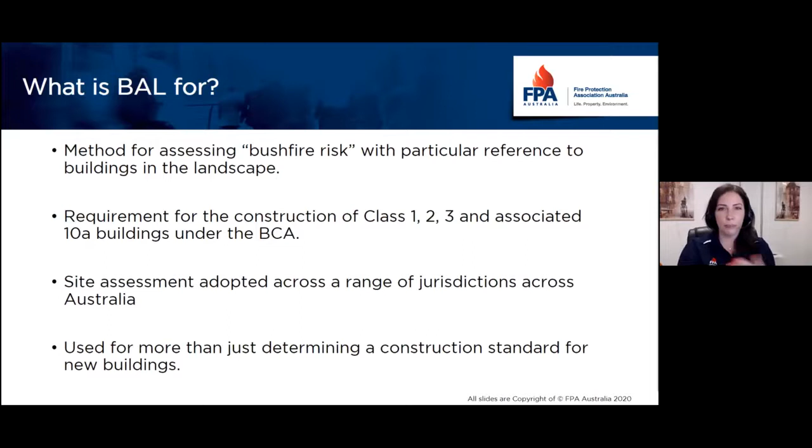Just to put it in perspective of where you can find it and why we need it - where does AS3959 sit? It usually sits within the building requirements. In the national context, you'll have an Act of Parliament, which is the primary legislation - your building act or planning act - which refers to regulations. Regulations quite often reference codes and standards. Depending on who requires the bushfire attack level assessment, you might find a reference to AS3959 in your regulation. It can also be called on directly in the NCC. AS3959 sits in this area and is only required when referenced by legislation.

Just to make it a little less complicated - this is from my home state. Each state has a different set, but in Victoria, for example, the building code works like this: we've got a Building Act which calls onto the Building Regulations, which calls onto the National Construction Code, which calls onto the Australian Standard AS3959 or the NASH standard. That's where you have to do your site assessment.

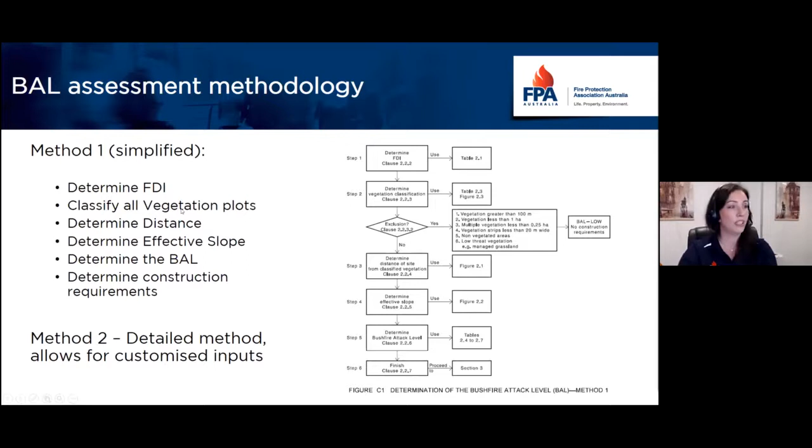FDI is the fire danger index, and you can find the reference to it for your particular jurisdiction within AS3959. For example, in Victoria it's either 50 or 100 - usually the more general area is 100. If you're in New South Wales, you've got 100 or 80 depending on which area you're in, and ACT is 100. Western Australia is 80, so I think most of Julie's examples are going to be Western Australian. Then the second step is classifying vegetation.

Vegetation is classified using written and visual description data provided within AS3959. There are 8 classifications plus exclusions, and it's the primary governing factor in determining the BAL. It's one of the most important steps to get the vegetation classification correctly. The exclusions present are one of the most contentious issues in the industry.

In fact, we were just discussing it with Julie and other members of our Western Australian working group - the problems with practitioners and government agencies looking into exclusions in different ways. There's a constant need to provide more clarity, practice notes, and good practices to understand what kind of exclusions exist and how you can apply them, to make sure people do not underestimate the bushfire risk, because it can result in quite tragic outcomes.

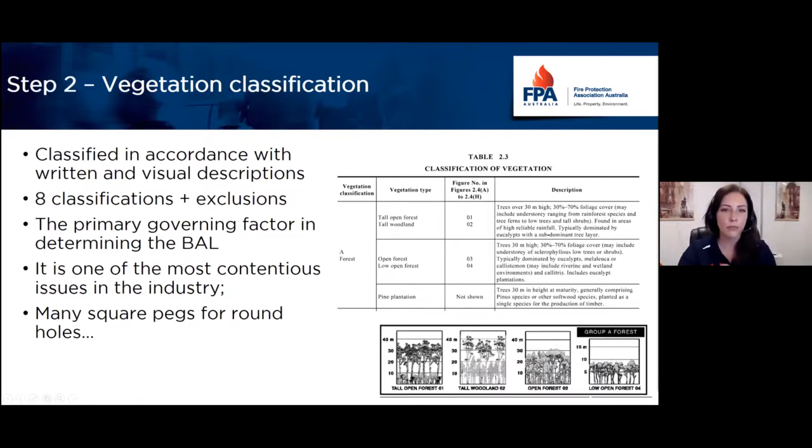Next example is a woodland. Woodland generally has a description in the AS3959 within the written description and images. A general rule of thumb, not a written rule, but the way we try to teach it in training, is that the difference between woodland and forest is that you can run through a woodland, but you can't walk properly through a forest.

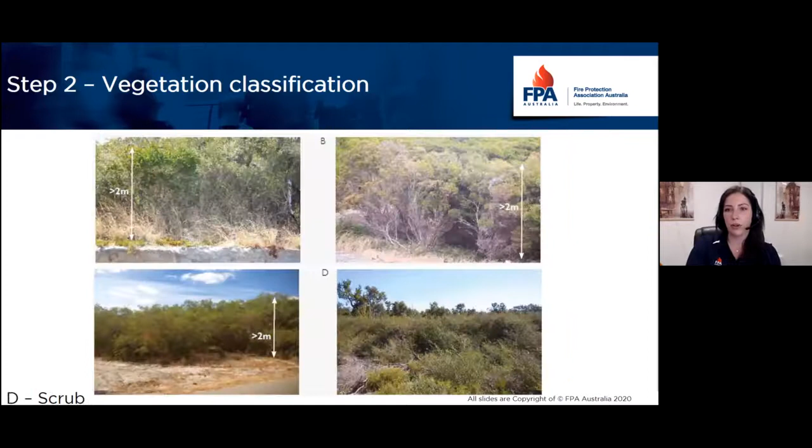The next step you require is to determine the distance - so we went around the site, we've classified the vegetation, now we need to identify the distance between your building footprint or elevation and the classified vegetation. You need to do this through the horizontal measure from the edge of vegetation to the building itself.

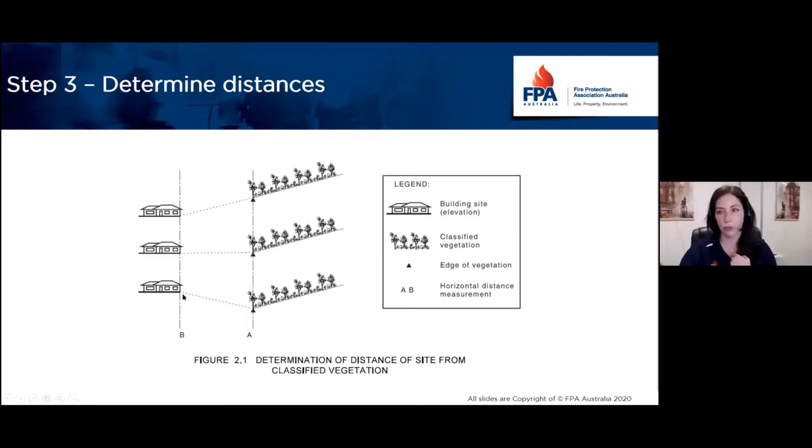The AS3959 is full of exclusions and explanations of how things are done. When you're assessing vegetation for forest, woodland, and rainforest, classified vegetation should be determined by the understory rather than the trunk. That's an exclusion you need to be aware of. So that's going to be the line along which you probably do the vegetation distances, and this line can probably move a little bit forward.

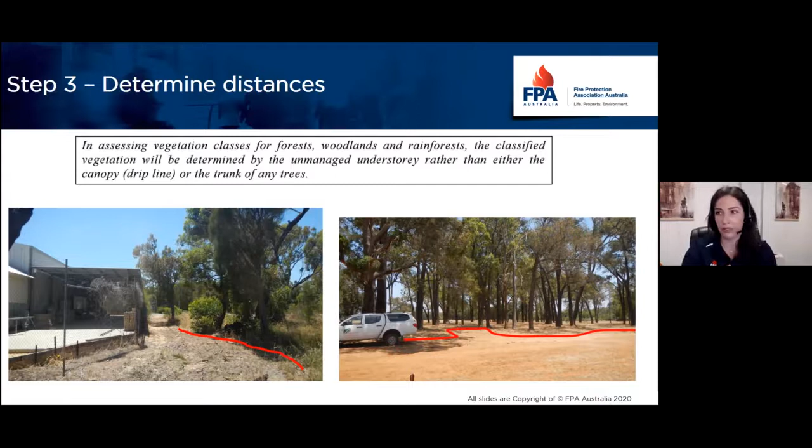Once we've identified the distance, we also need to determine the effective slope. There are two slopes when looking into site assessment - an effective slope and a site slope. Site slope is used for the Method 2 calculation, so we're not talking about that at the moment.

So the slope that we're looking at is this slope under the vegetation. Say this is forest, this is our building, we need to identify this slope - not this one, but this slope. I'm hoping you can see my mouse moving around because I make a lot of comments about that.

So there's a bit of description. The way that you usually do the slope identification, you want to do it beyond the boundary of your assessment. Your general site assessment boundary within AS3959 kind of sits within the 100-meter radius.

Maybe 150 meters. But depending on your site, if you've got a very complex site, if you've got a lot of slopes, or if the slope goes up and down, you probably want to go a bit further out just to make sure that bushfire behavior is properly calculated, that you're calculating all the steps properly, and that you're not under or overestimating your risks.

The way that the AS3959 method 1 calculation does it, the slope is calculated within increments of 5 degrees. So if it's 3 degrees, it's going to be treated the same as 0, 1, 2, 4, and 5. If it's 6, then it's going to be within 5 and 10, and so on till 20.

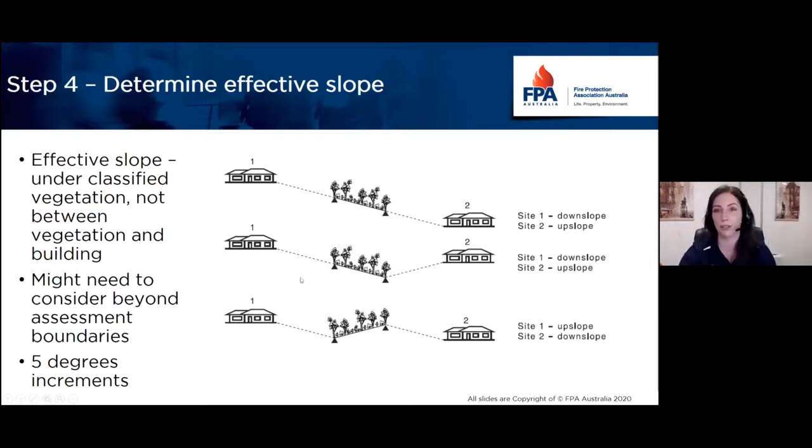So if you do have any questions, always refer back to the images. These are all images from the AS3959. So that's explained there.

Then, as I said, there's quite a lot of explanation of how the vegetation and the slope can be determined, and there's an explanation of what the effective slope is and how you can calculate everything.

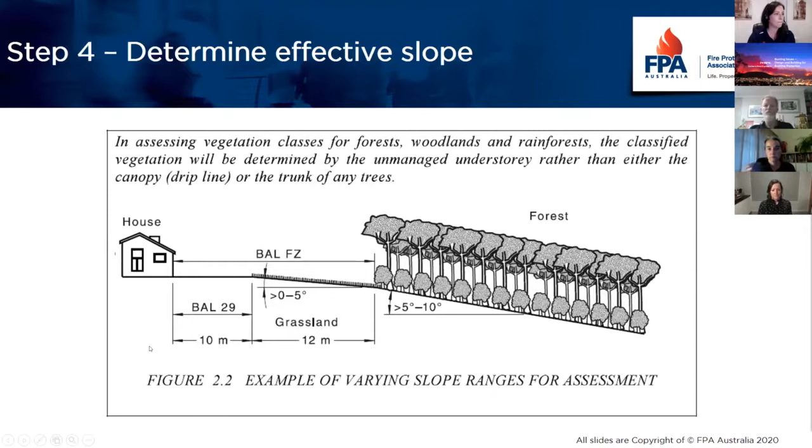And then once we've calculated all of the slopes, we've got our slopes, we've got our distance, we know our vegetation, we can then look into the BAL tables and determine your BAL for your building.

So for example, if we had forest at a downslope of 2 degrees, and we're sitting within a distance of 30, 32, or 33 meters, then we're sitting within BAL 29. Generally that's allowed as the building standard, which I think is a middle ground for most of the states.

Depending on your FDI, you have to make sure you're looking into the table with the proper FDI. Again, in the AS3959, it's tables 2.4 to 2.7, depending on the FDI that you need to have a look into. So it's your fire danger index.

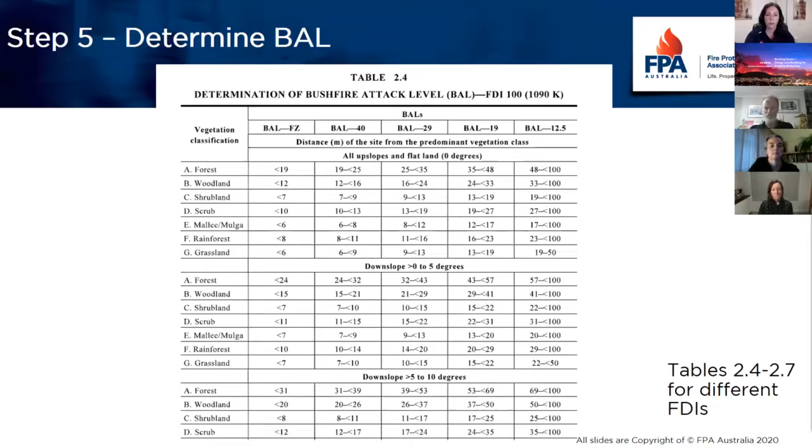And just to show you an example of how the BAL assessment is done with a map, we've done one small map. This is in Victoria, in Melbourne.

We went around, and if it's going to start—sorry, apologize. Yep, there we are. We went around and did a bit of classification of the vegetation.

We had a look at it, so we could see there's a bit of woodland, because it's relatively woodland, it's not really tall, it's quite sparse, and you can relatively run around. It's kind of somewhat managed.

Then there's a bit of excludable vegetation—apologies for my angle, I had a fun day I guess, I don't know why it came out like that—and that was excludable, that's just a managed road, and there's a bit of forest there as well.

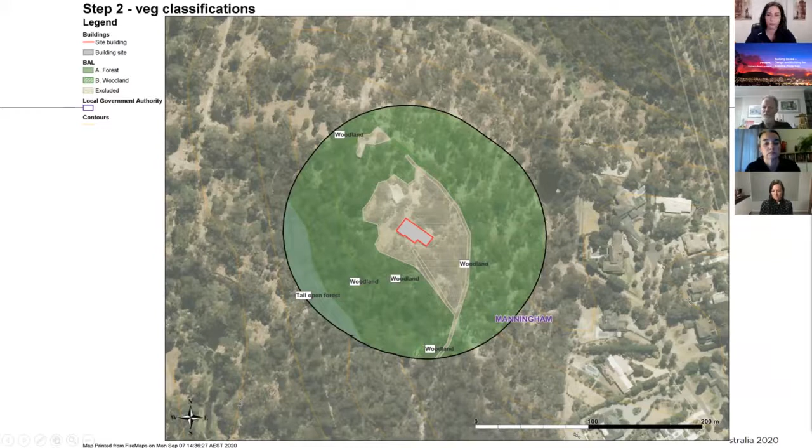This is the distances to the plot, so you can see the plots better here. You can see that's not the best mapping I've done, but it was done for students as a demonstration at some point.

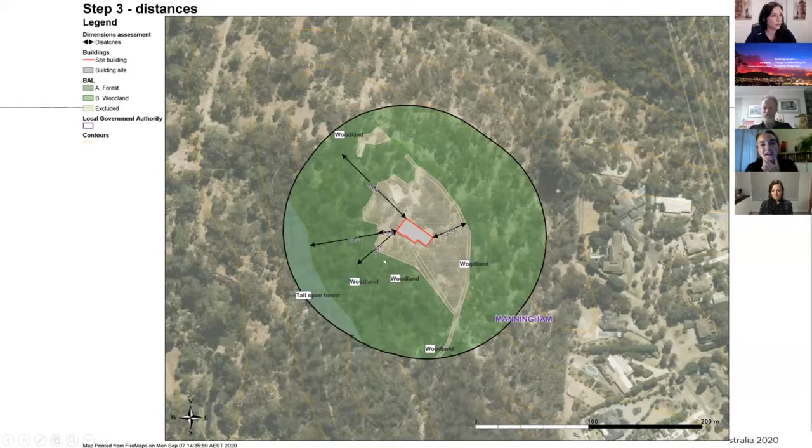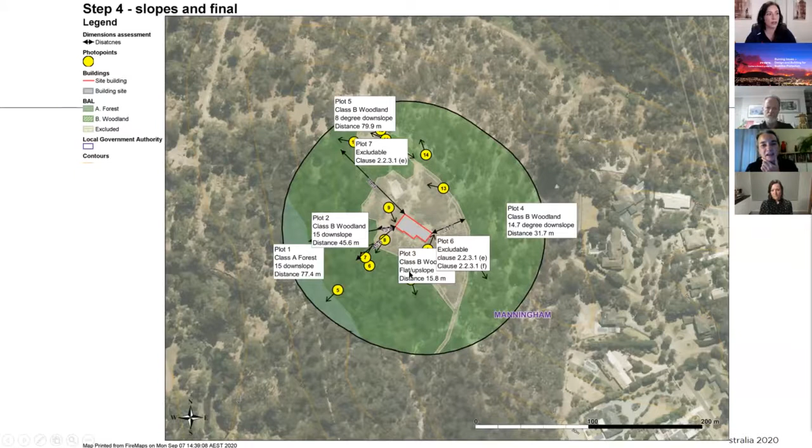And that's where we are putting our plots. So we have multiple plots that are affecting the building, and that's all the information that we've collected. And then we're putting it together in a table.

So we've got our vegetation classification, a plot number, a vegetation classification, an effective slope (so it's quite steep), the separation distance, and then the BAL that results. We've got 7 plots in this particular case, and we have to choose the worst case scenario.

So that's how the BAL assessment is done. I don't know if I've managed to convince you how difficult it is to get done. If you're going to start going out and doing it yourself, you will probably notice there are a lot of questions that can arise from this.

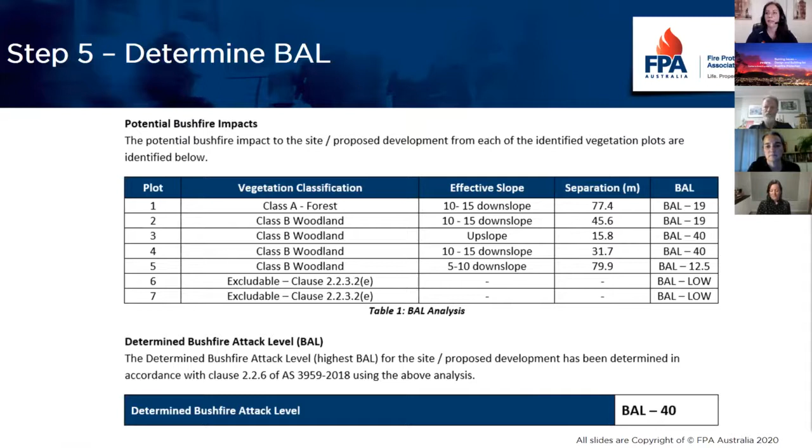We always suggest you use our BPAD accredited practitioners. FPA Australia has developed, and we administer, the Bushfire Planning and Design Accreditation Scheme. It has been implemented since 2006, and it recognizes practitioners who can assist the community undertaking development on land subject to bushfire impact.

It was introduced in New South Wales in 2006, then in Victoria in 2012, and in Western Australia in 2016. We've got a national framework approach that then customizes for specific jurisdictions. We are looking into Queensland and South Australia at the moment as well.

We're accrediting individuals or practitioners who provide bushfire assessment, planning, design, and advice services. All of our practitioners have to meet specific criteria, which includes training. They have to maintain their CPD points, and they all have to have insurance, which is quite important for customers when getting advice from somebody.

Our accreditation scheme runs across 3 levels. We get quite a lot of calls and questions asking to differentiate between the three. If you're looking into doing a simple BAL assessment, just a BAL assessment, that's generally our BPAD level 1.

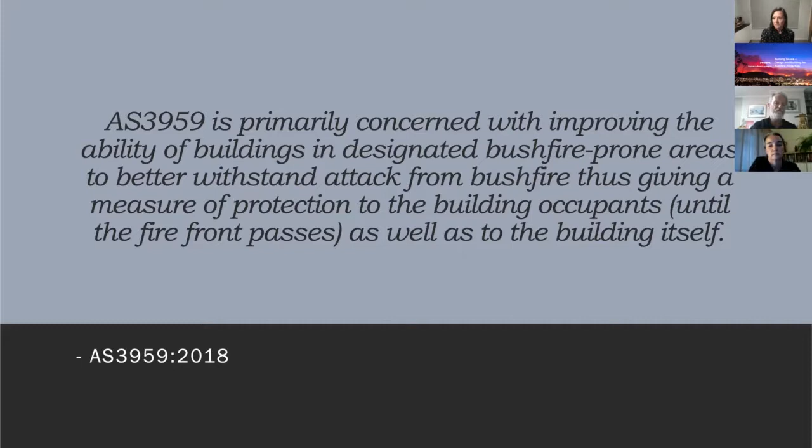This is just an overview of what AS 3959 is concerned with, which is improving the ability of buildings to withstand the impact of bushfires and giving a measure of protection to the occupants as well as the building until the fire front passes. So it is not intended to guarantee protection of property, it won't guarantee protection of life. It's intended to withstand attack.

From our perspective, designing and building for bushfire protection covers a number of factors. The first one, which Maria just talked about, is the BAL level. That's an integral part, because it identifies what your actual risk is. We have a fire danger index of 80 in Western Australia, based on our different vegetation types, and there are different vegetation types and bushfire risks in different parts of Australia.

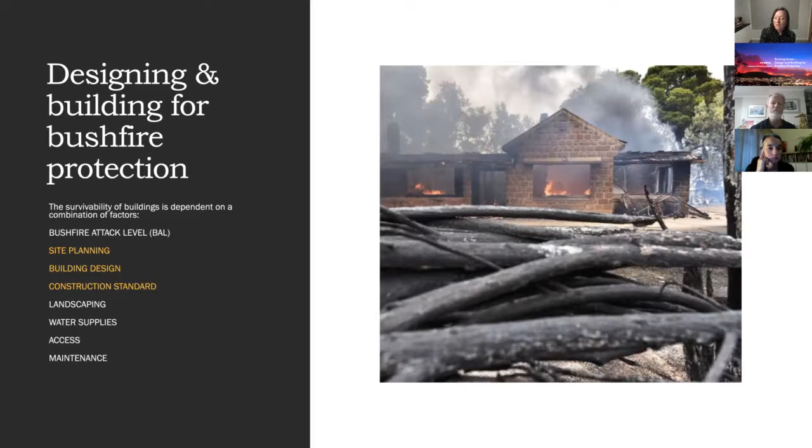The other things I'm going to talk about today relate to site planning, building design and construction standards. The other factors which are very important, but which we don't have time to cover, are landscaping, water supplies, access and maintenance. All of those items are referred to in AS 3959. And if you ever have a bushfire management plan developed for a subject site you're working on, they will usually take into account all of those aspects.

In terms of site planning, what you can see is that there are some factors of our site that we can't change, and some factors that we can change, and we can always think about how we respond to it. A BAL is determined by three main factors: slope, vegetation, and separation distance.

Sometimes you can reduce your BAL by considering those site conditions and identifying if the house could be better located to reduce its BAL. In Western Australia, under some of our state planning considerations, if you have a subject site and you can achieve lower than BAL 40, the local government will require you to position your house in that placement rather than construct in BAL 40 or FZ, because they're not considered under our state planning policy as acceptable bushfire risks if they could be achieved as lower.

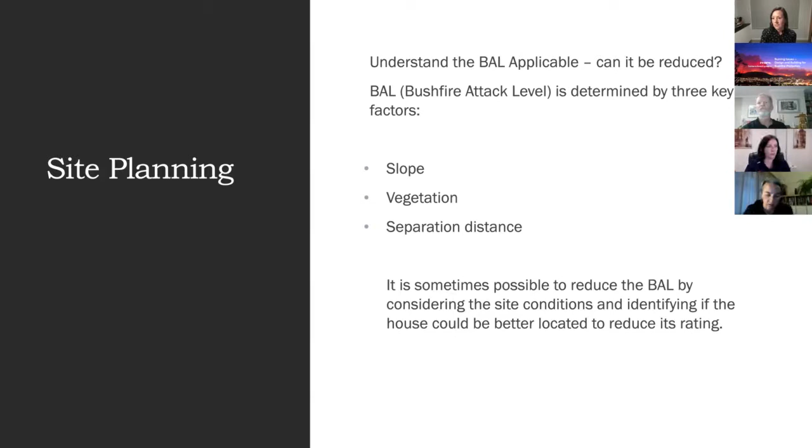Hi everyone, just while we're getting Julie back, my name is Jacquie Cleary.

I'm here tonight to talk about one of Renew's new projects that's coming up. I'll probably give you a bit more information about it later on after the speakers, but it's rebuilding for climate resilience. So it was probably a good opportunity to come along tonight and talk to you about that and the project, the resources that we're working on, the events and so on. And obviously lots of crossover tonight with the speakers that are here, and I'm busily taking notes from the presentation at the moment. There's lots to learn about BAL and so on, and bushfire resistant design.

I'm not too sure if Julie's back with us yet, so I could possibly go into a little bit more detail about it while we're here. Might be a good opportunity to jump in and talk about that while we sort out Julie's connection and her presentation, and give her a chance to catch up again when she rejoins.

As I was saying, this is important when we're doing site planning: to consider our separation distance from classified vegetation, as well as the slope. As Maria was explaining, there are differences in terms of where the house is placed, whether we go upslope or downslope, and that can impact on your BAL.

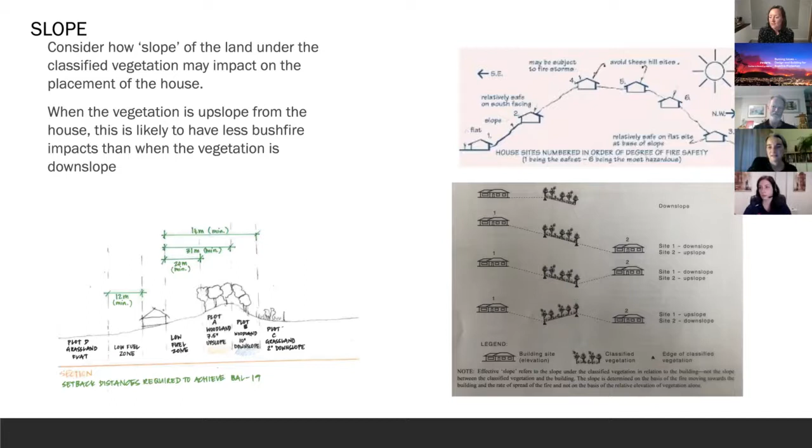So it's important to consider house placement at that time, and to take the advice of your bushfire practitioner in that regard. This is an example of a project in the Fitzgerald region of Western Australia. This building is a field station, and it has a residential component, which is how it got picked up under AS 3959, and was actually one of the first ones to be constructed when that legislation changed in Western Australia, which, as Maria had outlined, is only really 2016 that it came in for Western Australia in earnest.

This project actually ended up with only BAL 12.5, despite being in what was quite a high bushfire risk area, with mountain ranges some distance away, but we had a mixture of vegetation types, including shrub, scrub, mallee mulga, and woodland. What was key with this project was actually locating the building in a natural clearing, so that we didn't have to impact on existing vegetation types too much.

Particularly important for this project because it's an entirely off-grid facility designed for Bush Heritage, who obviously have strong environmental principles and didn't want to be out bulldozing land to build their new field station, which is focused on the Gondwana Link project. So what was key here was actually getting good solar orientation, getting good placement of the building with consideration of all those site conditions that are important in building design, with prevailing winds and those sorts of things, which were also going to assist in achieving resilience for the building design through its placement.

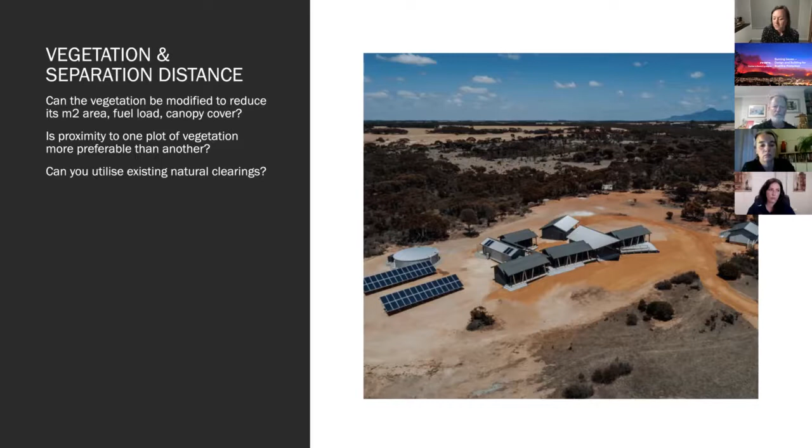We also were obviously targeting particular kinds of vegetation. So we had some grassland here, which they were able to manage. That was the vegetation we could get closest to. So it's a good example of just that initial process of site planning and using natural clearings.

We also had to protect key habitation spaces. As I mentioned, for this particular site, they're out there tracking their restoration work. So it was critical that the works we did to manage bushfire risk, including adding firefighting tanks and access and egress tracks to allow for safe evacuation, didn't impact on habitation for local species.

We also needed to respond to the local climate conditions. We had to maintain the existing environmental qualities and manage asset protection and safety of occupants and fire responders. So a critical component of planning for bushfire is also making it safe for those fire responders to get into the site to assist in suppressing fire or rescue, and leaving as well, which is a critical aspect for site planning.

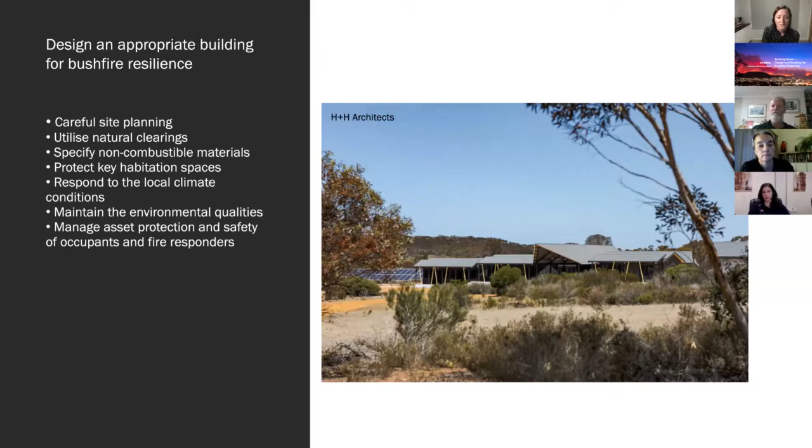So another aspect of site planning is obviously bushfire resilience: building to last and selecting materials that are robust and low maintenance and that respond to all aspects of their conditions and environmental setting. As an architect, my favourite part about AS 3959 is it demands a site responsive approach, which is not mandated anywhere else in any other construction guidelines or standards.

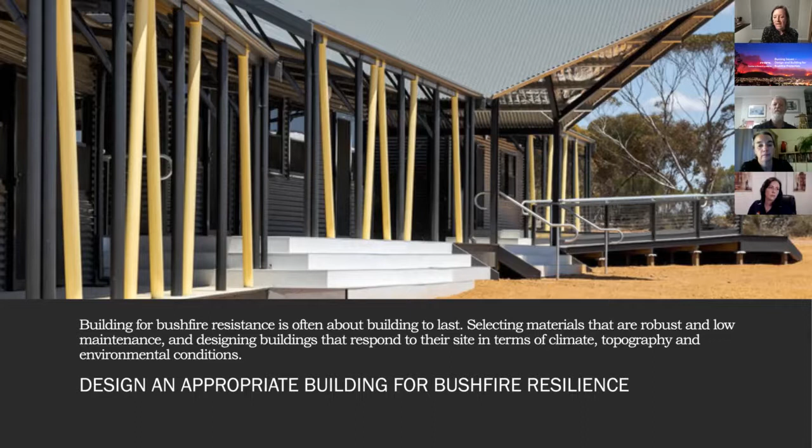Although that means for lots of people that they get frustrated that they might end up with a different BAL rating to their neighbour, what it does mean is that it highlights the importance of considering every site for its own merits and its own risks and designing appropriately. So we should all celebrate what opportunities this provides us.

So some key considerations of bushfire resilient construction. I'll go into building design now. One of the examples you can see here is a local example from Bremer Bay in Western Australia. It was done by architect Ian Weir and was another first cab off the rank in Western Australia for designing for bushfire design.

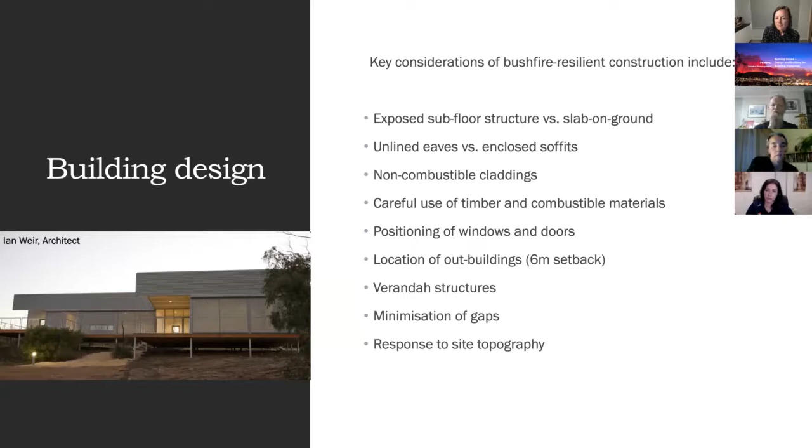He has experimented with a number of these key factors: the exposed subfloor space versus slab on ground, having unlined eaves versus enclosed soffits, the use of non-combustible claddings, the careful use of timber and combustible materials, positioning of windows and doors, the location of outbuildings and consideration of that 6 metre setback, veranda structures, minimisation of gaps, and response to site topography.

So one of the key factors I think is material selection, and we need to keep in mind at all times that although the standard outlines what materials are non-combustible and suitable, all materials have the potential to fail in a bushfire.

We have to resort back to thinking what is the purpose of the material use. It's to provide resistance and resilience in a bushfire. It's not intended to be fire resistant in the same way we sometimes have for other components, so it has a different performance standard, which I'll refer to later.

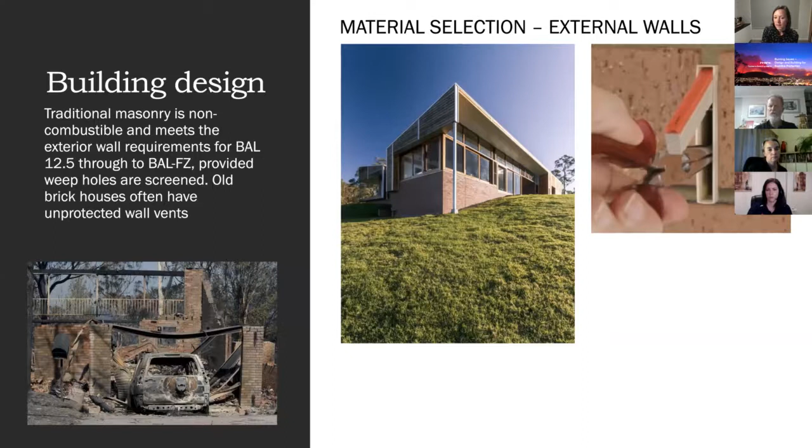Traditional masonry is obviously non-combustible and meets all the requirements up to BAL FZ, provided that weep holes are screened. But remember that many older brick buildings have open wall vents that can be vulnerable to bushfire attack.

Other materials - these are some examples on the left, done by H&H Architects in Denmark, Western Australia, which is a forest region and very high bushfire risk, and has recently been the subject of a report identifying that the whole town is of extreme bushfire risk.

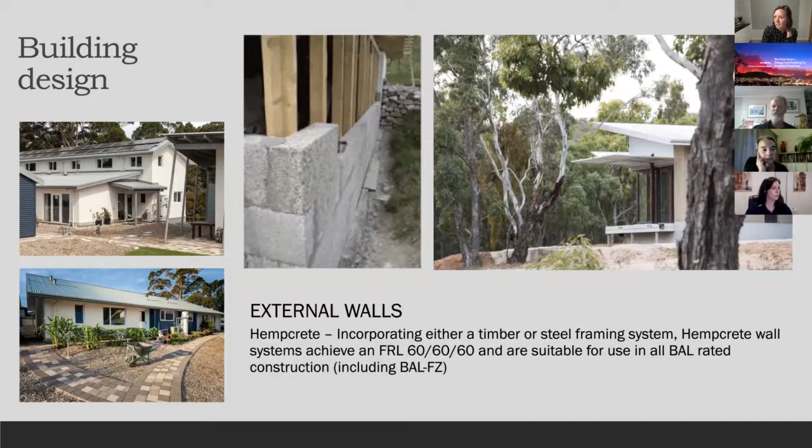We utilised this project, it was BAL 19 with hempcrete construction. Hempcrete can achieve an FRL rating of 60, 60, 60, and as any of you who know the flammability requirements for BAL FZ and 40, they require 30, 30, 30. So hempcrete is considered a compliant external wall system, and is also an ecologically sustainable material that achieves excellent thermal performance.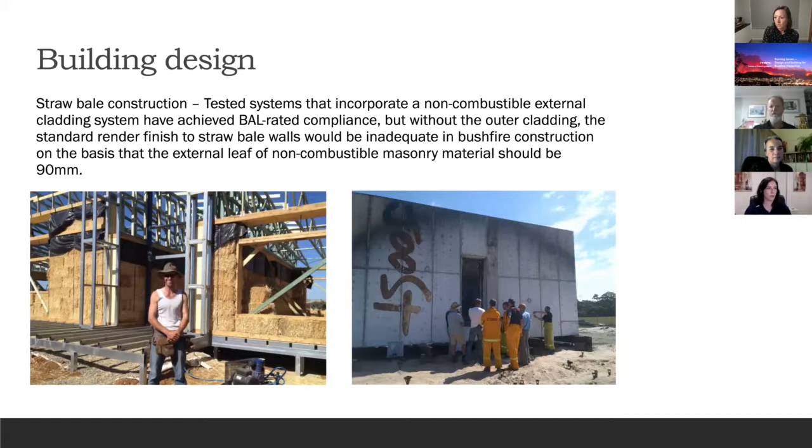Straw bale construction is a bit trickier. It needs to be a tested system that complies with AS 1530 regarding flammability, on the basis that the outer cladding is not a solid material - they usually just put a lime render over the top of the straw bale. A standard render finish to a straw bale house is not considered compliant to AS 3959. So usually you could have straw bale if it's in conjunction with an approved and BAL rated compliant wall system that includes another material applied externally to protect the straw bales.

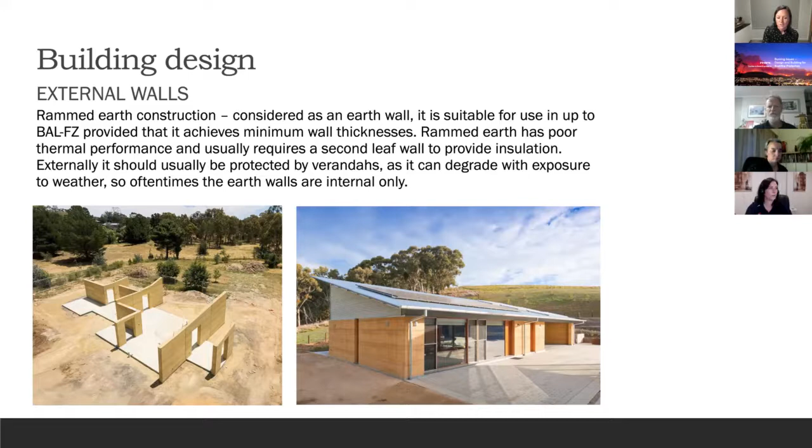Rammed earth construction is considered an earth wall system, so provided the external walls meet the minimum 90mm thickness, they are compliant with AS 3959 all the way up to BAL FZ. Rammed earth can have poor thermal performance in terms of insulation, so it usually requires a second wall leaf to achieve thermal insulation and thermal mass. Particularly in our climate, which has a lot of rainfall, the external walls usually need to be protected by eaves, overhangs or verandas because they can erode from exposure to weather. So it is a compliant solution, provided it meets all the other objectives of the National Construction Code.

Likewise, Hebel blocks or aerated concrete meet all requirements up to FZ - completely non-combustible and non-flammable - and are used in a range of panel or block systems that can be readily adapted for bushfire construction.

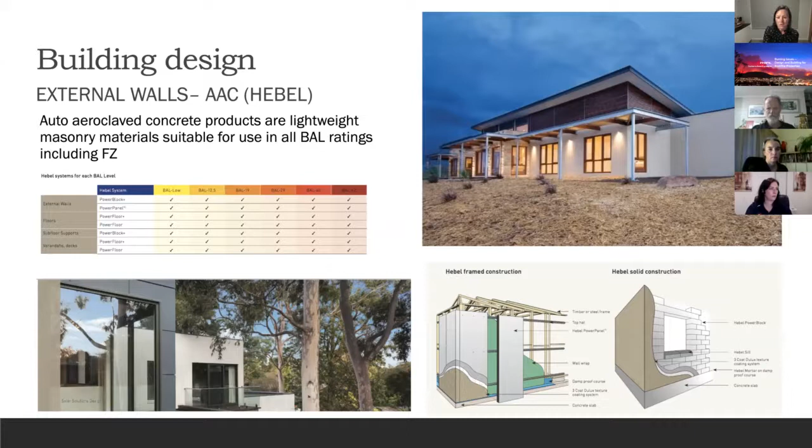Timber - the important thing to understand is that timber can be used in all BAL levels. What's important, which is the usual question I get from builders and BAL assessors who come from an environmental background, not a construction background, is how do we deal with lightweight timber, for example H3 pine, which is very popular in our part of the woods for construction.

Treated pine stud walls and trusses are suitable in BAL construction, provided they're protected by an external cladding that is non-combustible. So you don't need bushfire resistant timber as your internal wall structure if that structure is protected by an appropriate cladding.

It can be more challenging to use it on exposed structural elements like subfloors and verandas, unless they're protected or separated by a fire rated system. So when designing with exposed treated pine or timbers that aren't considered bushfire resistant, they're considered a sacrificial part of the building. So long as they're not acting as a fire source feature and destroying the bushfire resistance of the main house for the lower BALs, it's appropriate to use them for decks, verandas and pergola structures.

Bushfire resistant timber may be used in unenclosed subfloor spaces, but only up to BAL 29. The ones frequently used over here are merbau, blackbutt and spotted gum, none of which are local species. Our only local species are jarrah and karri, which are very strong hardwoods in Western Australia, but only approved in horizontal applications as bushfire resistant timbers, and have been slow to be adopted.

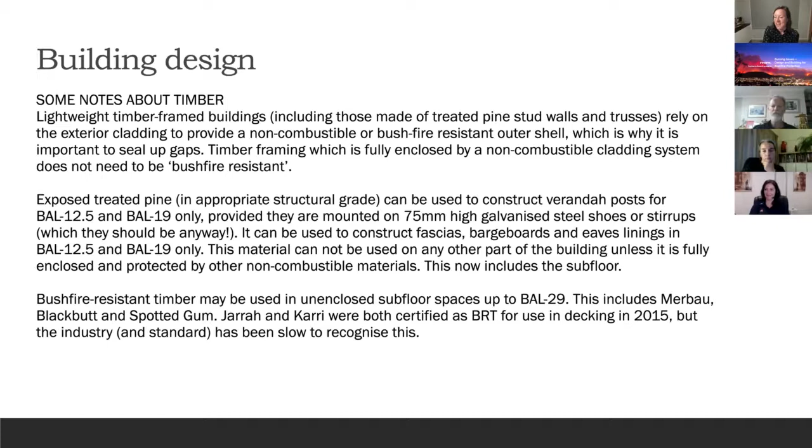As a West Australian, I can tell you AS 3959 feels very Eastern oriented with all its timber specifications. So your normal favourites like Western Red Cedar can only be used up to BAL 19 if they are installed more than 400mm above the ground.

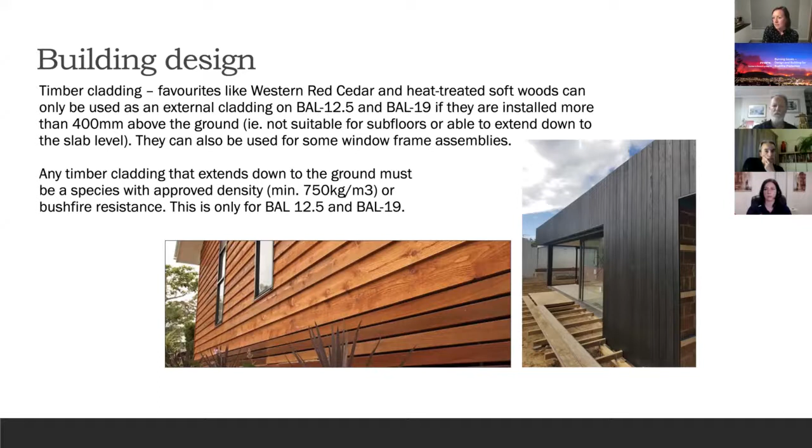They're not suitable for subfloors or extending down to slab level, though they can be used in some window frame assemblies. The critical area the BAL ratings look at is the lower 400mm of the wall. In that area, we usually recommend either bushfire resisting timber at the lower BAL levels, or a fully non-combustible lining to the subfloor. The reason is ember attack, and the build-up of flammable garden material that can push embers into the subfloor and make the rest of the building vulnerable. That's why timber isn't appropriate in those applications.

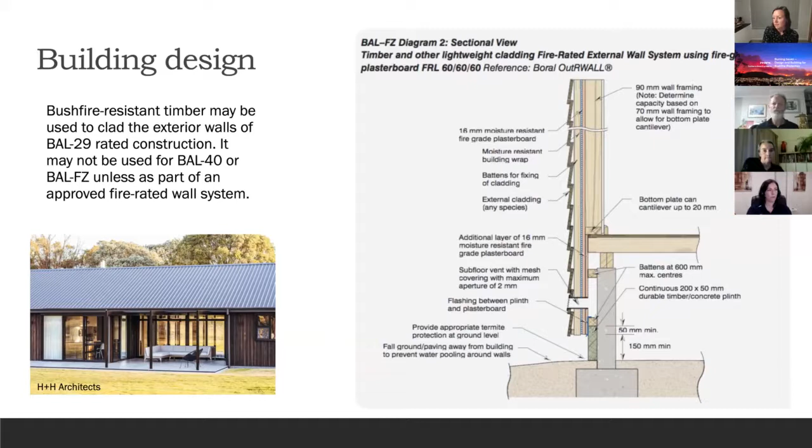Bushfire resistant timber can be used to clad exterior walls up to BAL 29, but can't be part of BAL 40 or FZ unless it's sacrificial. There are great resources for building with timber in bushfire prone areas. The featured house here is actually mine, and was on the front cover of Fire Australia regarding timber construction in bushfire zones. It's clad with Jarrah, and is only a BAL 19, showing it's possible to use timber and still achieve the aesthetic or sustainable outcomes you're after, depending on your timber source. Externally, it's usually part of a broader fire-rated wall system with multiple layers, including fire-resistant plasterboard, to protect the interior from radiant heat and ember attack. There are some examples included there.

More common non-combustible lightweight materials are profiled pre-coated steel, fibre cement, or magnesium oxide board, which can all be used up to BAL FZ and are very common in that regard. That doesn't mean they won't fail in fire - they're affected by heat just as much as anything else - but they're intended to resist the attack of the flame front and not be combustible.

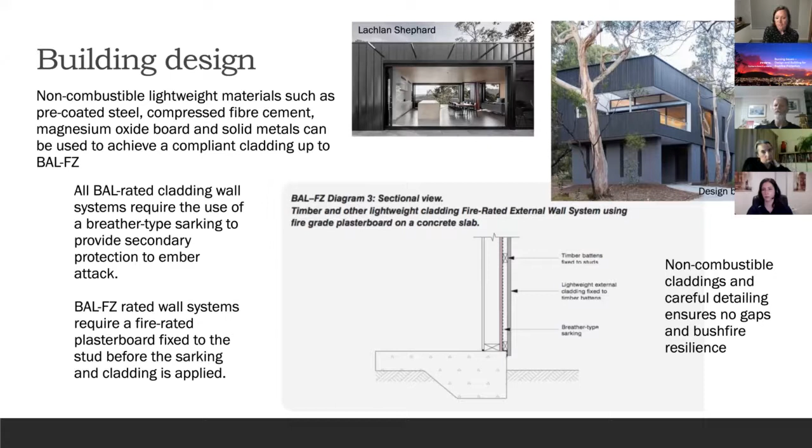They do require sarking to the roof and wall materials, again for ember attack protection. Most of the National Construction Code leads everyone to think sarking is a requirement, but we see builders not necessarily using it in all walls. What's great about bushfire construction is that sarking is required as an ember guard, and then the cladding is fixed over it, helping with gap sealing and providing that extra layer of protection. There are plenty of examples available for those fire-rated wall systems using sarking.

I wanted to mention gap sealing. It's interesting that the code requires us to seal up all gaps. This is where the interface between the National Construction Code and AS 3959 doesn't necessarily work well together, particularly with subfloor ventilation or roof ventilation, because of the requirement to put mesh with a maximum aperture of 2mm over all grills and exhausts. That's intended to protect from radiant heat and ember attack, but it can have unintended consequences - we can't just design like we always have with subfloor vents or roof venting and cover them with fine mesh without considering impacts on airflow.

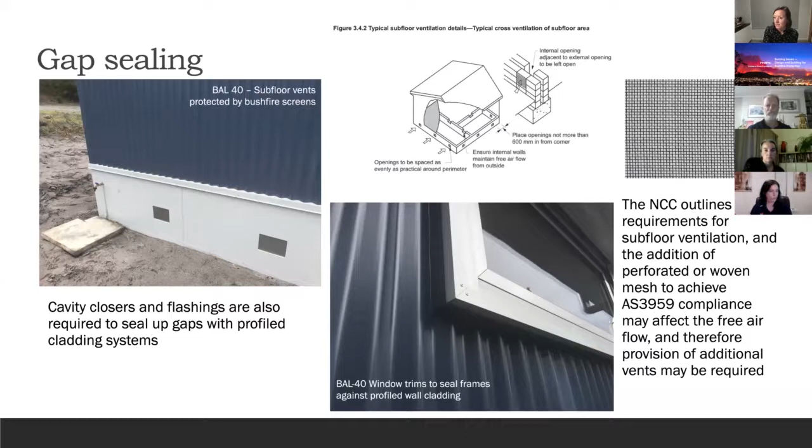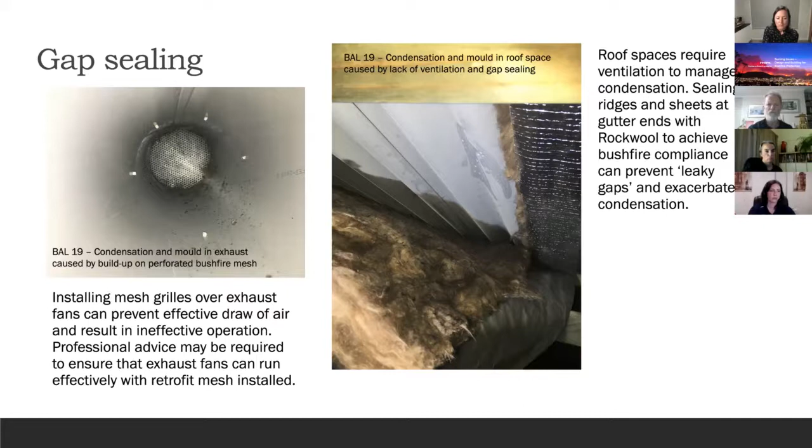That has some impact. Here's an example of a BAL 19 rated residence constructed to meet the code that had some unintended outcomes from sealing up all penetrations and putting perforated mesh on the exhaust fan - they've got considerable condensation issues they're now managing. The builder felt this was caused by having to install rock wool at the ridge and sheet ends, which removes the old traditional leaky air syndrome we used to have. It has exacerbated condensation because there's no active ventilation system in the roof or exhaust fan. These are some of the unintended consequences.

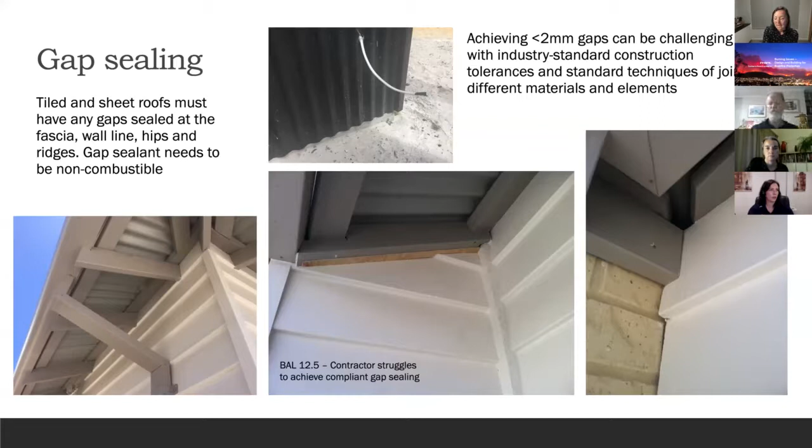These are some examples I've taken from site inspections of projects, all BAL 12.5, with a contractor struggling to achieve the 2 millimetre gap requirement and using inappropriate materials. You can see he's literally screwed in a piece of plywood to fill up the gap, which is obviously combustible in itself. There are a lot of challenges for average builders to achieve the high levels of compliance that AS 3959 requires, including understanding that gap sealant needs to be non-combustible too.

When we've got subfloors, we often end up with penetrations that come through them, particularly for plumbing, and consideration needs to be given to fire stopping those areas.

What you can see here is all under one house that was BAL 29 constructed. The deck was constructed using bushfire resistant timber on top, the Merbau, and then they protected the subfloor frame with an intumescent paint. That was considered part of a performance solution to achieve bushfire resistant timber. You can see the classic effects of Merbau staining there as well.

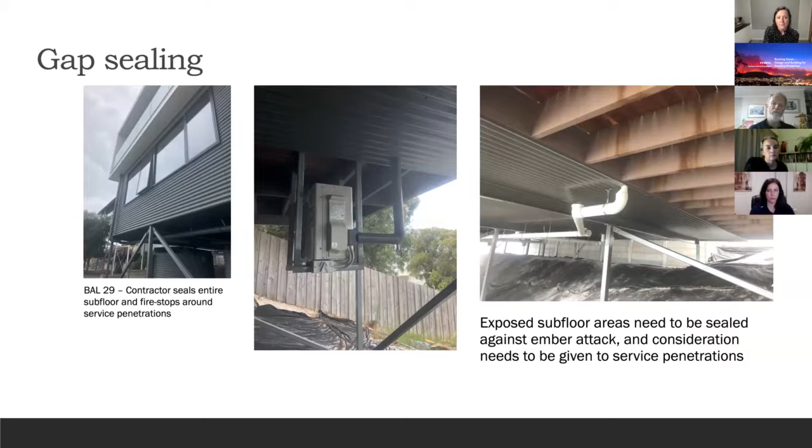The critical thing is the number of penetrations that come through a typical subfloor, and the extra effort the builder had to go to in terms of lining the underside with a non-combustible sheet lining to protect it. There are also lots of gaps in AS 3959 that aren't covered, for building components that might come up.

So I've got an example there. We had a BAL rated property where they had an external composting toilet which had a penetration, and the builder ended up constructing a fire resistant enclosure that still allowed for the protection of the system and the sealing up of the subfloor, but it was extra work involved for them.

We've also had details where we've had to create, for example, the awning window on a BAL FZ house, to make sure that wasn't adding to the bushfire failure, I guess, by creating new seals or having combustible materials on the outside.

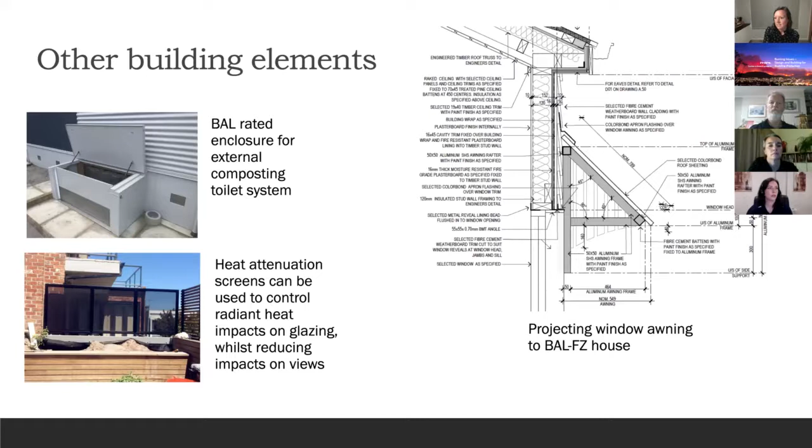So those are just some examples - fencing, screening, things that can come up that AS 3959 can be silent on. What you try and do in those circumstances, from my perspective, is understand the intent of the code and use that to guide your decisions.

There are also other building elements that we know can assist in the survivability of a construction during a bushfire, but are not recognised as compliant solutions under AS 3959, and one of those is bushfire sprinklers. I get this question all the time of people saying, oh, we want to invest in getting bushfire sprinklers. It's not a compliant component of AS 3959, so that's just something you need to keep in mind.

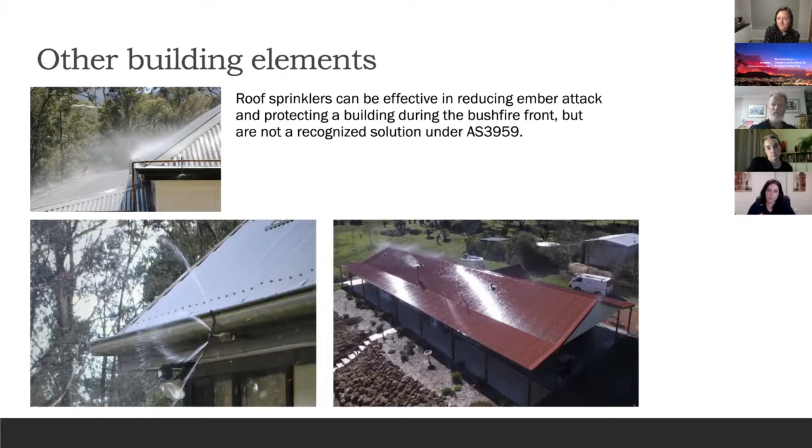Roofing - we're typically using roof materials these days which are non-combustible. The critical factor that most people don't recognise is the requirement to fire stop the profiles, which means more than just using your normal contour strips that close up the eaves. We're having to put non-combustible rock wool insulation at the sheet ends as well as at the ridge and any other penetrations, and particularly for higher BAL ratings like 40 and FZ, the roof structure also needs a layer of ply underneath the roof sheet.

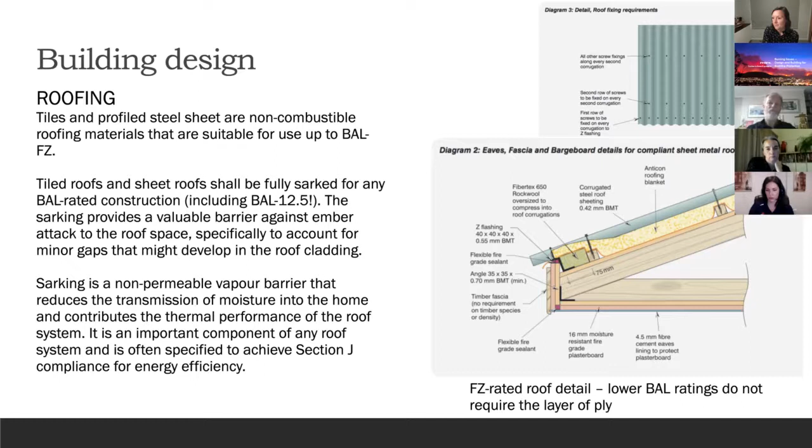That can obviously add a considerable amount of cost. It's intended to assist with ember control, and it can have great benefits energy efficiency wise, but it is a big impost that affects the cost of roofing for the higher BAL ratings.

The other key thing is that the roofs need to be fully sarked. I've been to some projects recently where the sarking has been cut around setback gutters, skylights - all of those sorts of things are considerations we need to think about, because the roof is playing an important role in protecting the building, particularly when you look at the shape of flames coming in a bushfire front that are hitting the roof as well as the walls. So it's important to have a look at that.

We usually specify and do similar details to these ones shown here in our construction documentation, so that the builder is very clear on where the rock wool needs to go, where the ply is required, and also the sealing up of eaves.

As you saw from those earlier photos, it can be difficult to achieve a sealed soffit without an eaves lining, particularly at the wall and roof junctions.

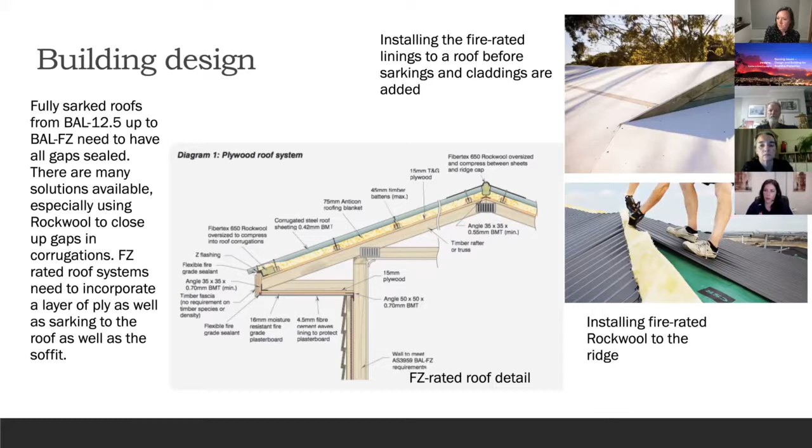Windows and doors are also an important component. You'll see a lot of discussion about those in AS 3959, and their location in relation to the ground or decks, and that's because they're vulnerable - glass is very vulnerable to heat, radiant heat effects.

We've got provisions that relate to glazing, to the materials that can be used in the frames, and also protection of them with either corrosion resistant and fire resistant screens or bushfire shutters. This is an example of a BAL-40 protected window that's got a shutter that comes down and is fully sealed up against bushfire attack.

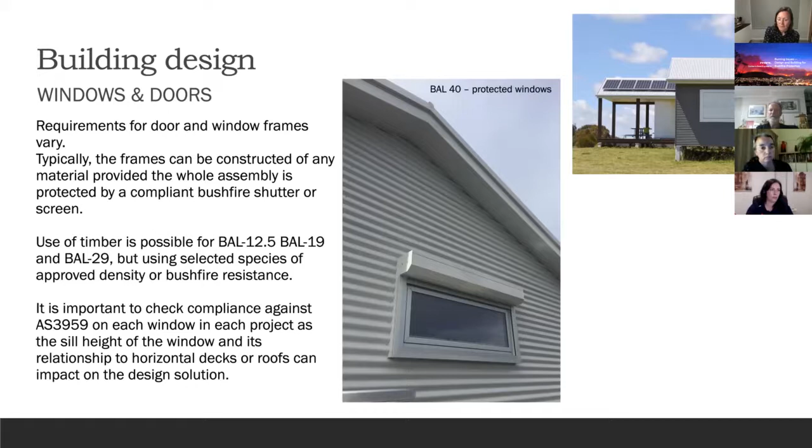Not always the most attractive aesthetic that you're looking for - these were some of the compromises. There are also BAL-FZ rated window systems available.

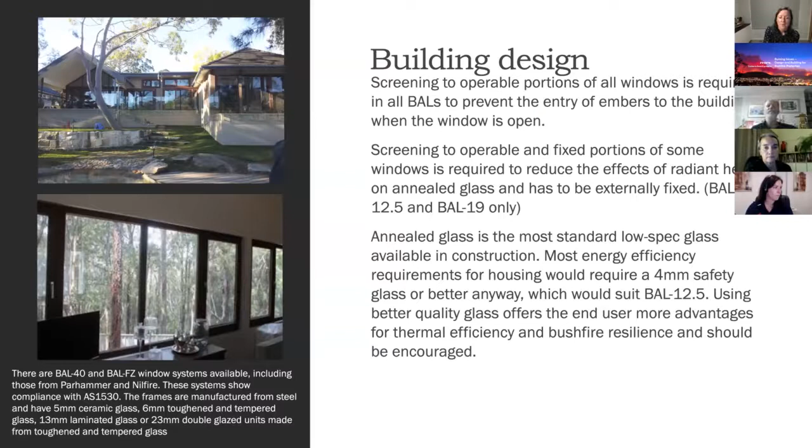I've listed two brands there, Parhammer and Nilfire, that we've used before, that mean you can retain your aesthetic. Their prices are way higher than normal glazing because the frames are steel and the glass is ceramic, toughened and tempered. So it's important to understand that you can achieve the aesthetic, but it can be at a very high cost. It achieves great things in terms of thermal performance and energy efficiency of those windows, but it can be a big cost impost.

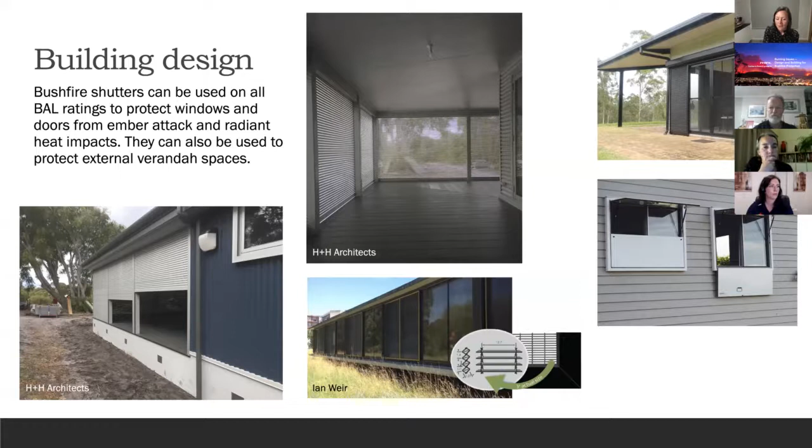Bushfire shutters can also be used, and I've included some examples here of bushfire shutters that we use to protect external veranda spaces as well as windows and external walls. They have some design advantages in terms of insect protection and those sorts of things that can be desirable. There can also be ones that open up either from the sides or the top, like a casement or awning, to protect windows. But they're quite an obvious feature that you'll see on bushfire designed houses.

Now I just want to quickly touch on how AS3959 interfaces with the National Construction Code. I've included an excerpt showing that the deemed to satisfy solution for any building of Class 1 or Class 10A located in a designated bushfire prone area is to construct it to AS3959 or to the NASH standard. I haven't included all the exclusions that apply with New South Wales, mostly because it doesn't apply in my area and we're literally building to AS3959 for deemed to satisfy.

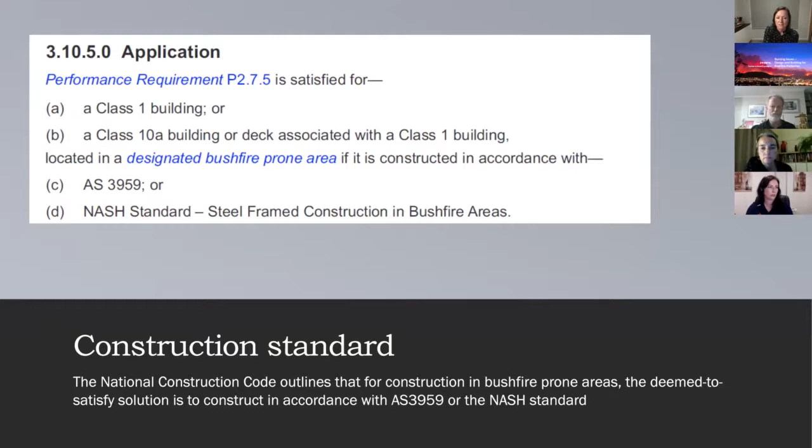I've just included here the NASH standard. That's suitable up to BAL-40 only, and is based on research done by CSIRO and detailed testing to establish the construction requirements for steel framing.

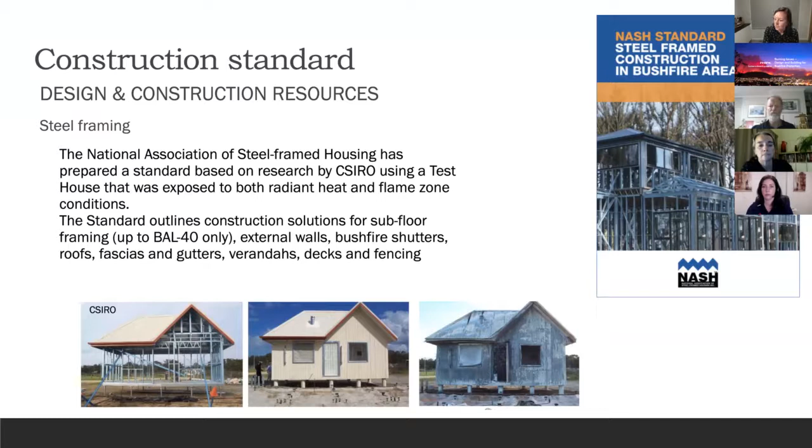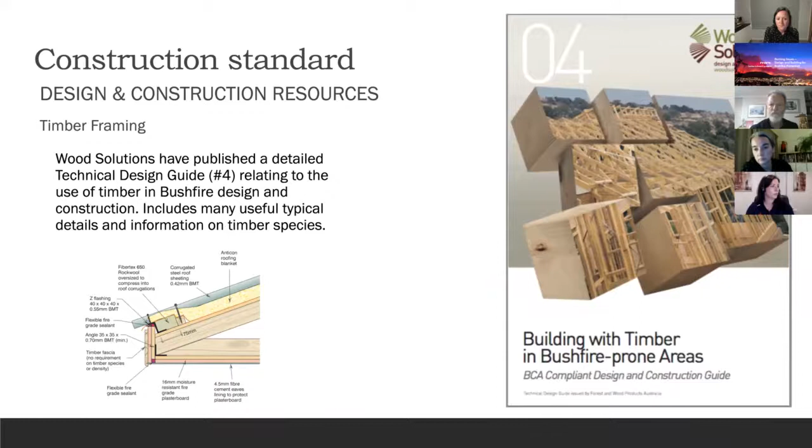Wood Solutions also has some excellent resources relating to building with timber in bushfire prone areas, and I strongly recommend this if you're in a region that uses timber framing as opposed to steel framing. They've got excellent resources about timber species and application of appropriate details. There was the old Handbook 36, published in 1993 but kept as a draft, which is still out there and available, but it's probably better to use more current systems.

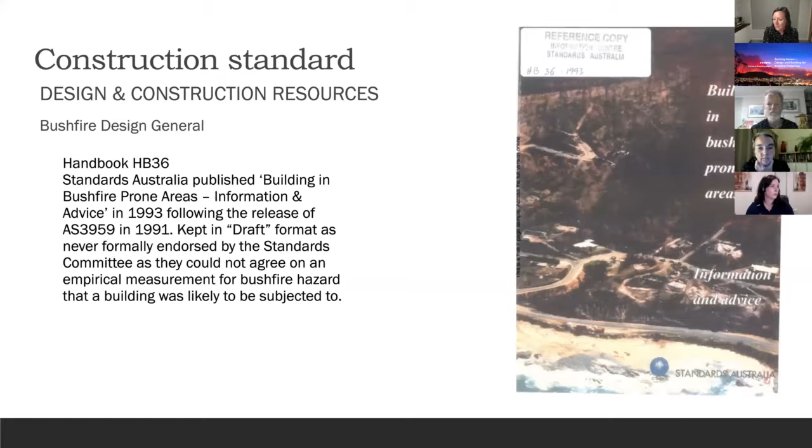Here I just wanted to go through some of the key interfaces of the National Construction Code and AS3959. One of the key questions we often get is to do with fire separation. Just referring to Class 1 buildings, many of you will know that when looking at fire separation between what are called fire source features, they're much more lenient in terms of the building, requiring either 900 or 1800 millimetre separation to prevent transfer of fire and fire spread across buildings.

But when we're talking about AS3959, to facilitate fire separation between residential buildings and adjacent structures, they mandate a 6 metre separation distance. Otherwise, that adjacent structure, which we're usually talking about sheds, carports or granny flats, must be constructed to the same standard as the main residence, so they can't be excluded. That's just a funny aspect that's different between the National Construction Code and AS3959.

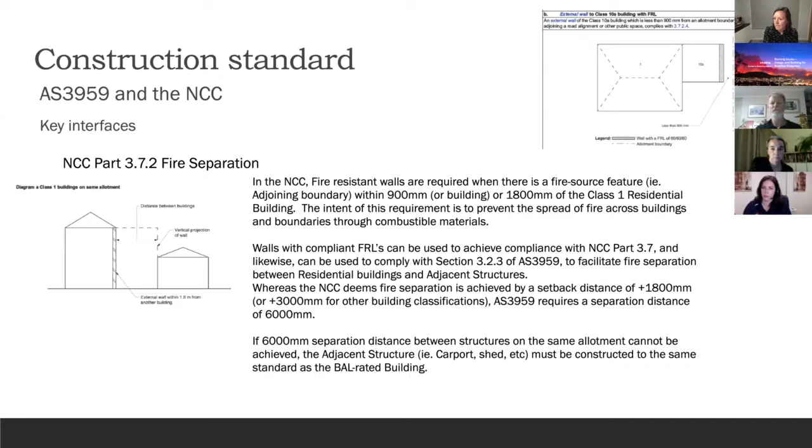Condensation management - I touched on this previously. Obviously the NCC requires mitigation of condensation within a building, and the deemed to satisfy solutions are generally focused around water barrier membranes to external walls, encouraging the use of sarking to manage air leakage and thermal performance. AS3959 also requires the use of sarking as a continuous barrier against ember attack.

Depending on the climate zone, one important thing is whether or not sarking should be vapor permeable or impermeable, because impermeable sarking can often contribute to condensation, potentially in climate zones where it may not previously have been an issue.

The NCC also has some guidance regarding exhaust systems being discharged to outdoor air or to ventilated roof spaces. But then AS 3959 requires those vents to be covered with mesh, which may impact on their operation or effectiveness.

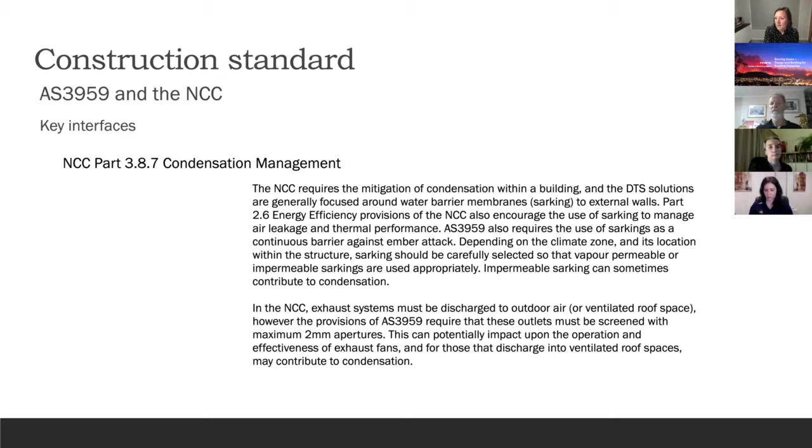So that's something to be considered, and it may require professional advice regarding ventilation. Part 3.10.5, construction in bushfire areas, identifies that the deemed to satisfy solution is to comply with AS 3959 or the Nash standard, although there are some performance solutions available in other states.

A critical point is about bushfire shelters. They're classified as class 10C under the NCC, and usually only considered appropriate for BAL 40 or FZ sites or on vulnerable developments. But it is not recognised as a deemed to satisfy solution under AS 3959. We often get clients saying, rather than building the house, why don't we just build a little bushfire shelter as our compliance solution? That's not accepted under AS 3959.

There are also building code guidelines relating to private bushfire shelters, which are just guidelines. I would not recommend using those unless you feel competent in their application, and potentially get approval from your local building surveyor or local government, as well as a bushfire practitioner, as it's really part of a performance solution for the whole site. There are key factors in that guideline regarding separation distance between the shelter and the main residence, and other things to take into account. They're not as straightforward as planting a bunker in your backyard.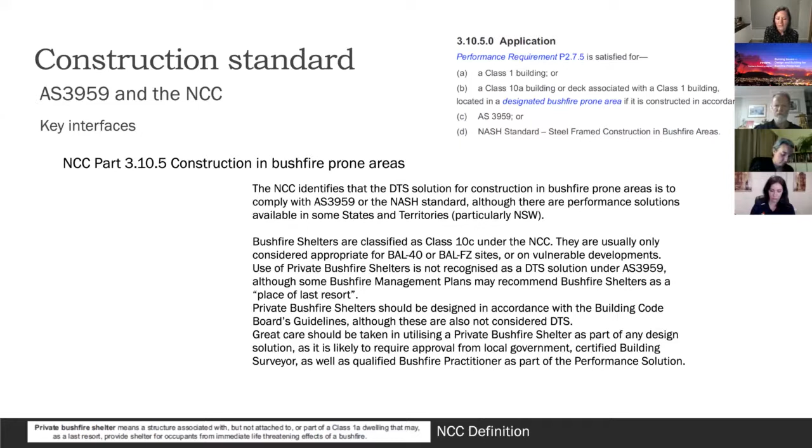There are definitely gaps, and in Western Australia in particular, our state government has been slow in mandating the latest version of the National Construction Code, which gives some builders the ability to use earlier editions without having to meet all these requirements. So they're then stinging consumers with extra costs associated with bushfire compliance, which really should have been covered by their energy efficiency performance.

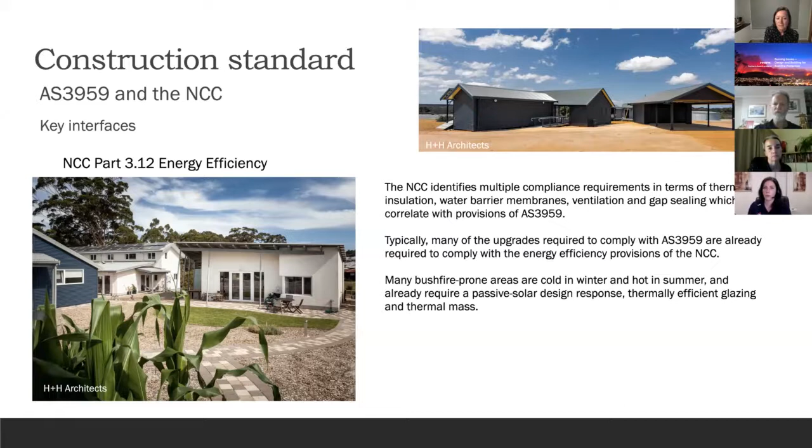So an overview for designing and building for bushfire protection: you really need to understand the BAL applicable to the site. Can it be reduced, and can the house be better positioned to reduce bushfire impacts and environmental impacts? Design an appropriate building response and incorporate the right details. Does the construction method and style of building suit the site and bushfire requirements?

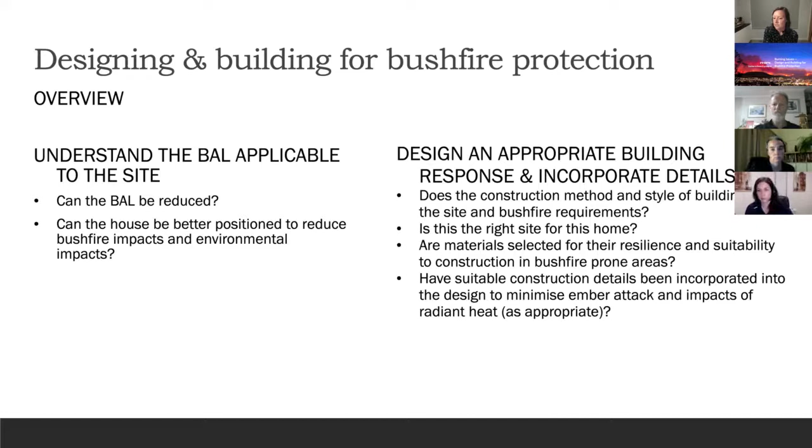We have this issue in our zone where we've got mountainous regions and people want to build pole homes. They're not always the most appropriate for bushfire construction, so you've really got to think, is this the right site for that home? Are materials selected for their resilience and suitability for construction in bushfire prone areas? And have suitable construction details been incorporated to minimise ember attack and impacts of radiant heat?

Certify compliance. Many builders don't realise that when they lodge their notice of completion, they're basically agreeing they've constructed the building in accordance with AS 3959, if that was mandated as part of their building permit. So if in doubt, builders should always seek advice from a professional who understands the code, during construction or at the end, and potentially liaise with their building surveyor. I often do inspections on behalf of builders and provide reports back to building surveyors, because I have experience in construction that allows me to assess whether something's been constructed to the code or the intent of the code. But not everyone is going to feel that confident.

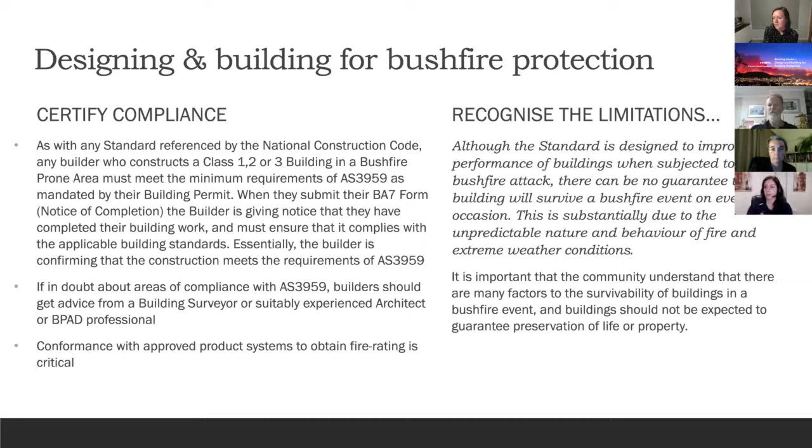Lastly, recognise the limitations. The standard is designed to improve performance, but it does not guarantee safety and does not guarantee the survivability of the place. So we always recommend that people have other plans in place that will allow them to safely exit the building, and that staying in the building should also be considered a last resort, not always the best solution.

So I guess in summary, from my perspective as an architect, site responsive design should already be taken into consideration, including all the aspects that we look at for BAL, which is topography, solar orientation, prevailing winds, shading, sun protection, thermal insulation, thermal mass, retention of environmental features. We should already be considering the suitability of materials for their durability, their low maintenance, and their appropriateness for different environmental conditions, and bushfire should be considered as one of those.

All of those aspects are important in bushfire and important for environmental and site responsive design. Building to AS 3959 is generally just good building practice. It prioritises resilience, durability, building performance, and site responsive design. So I guess we should be encouraging people to build to this standard.

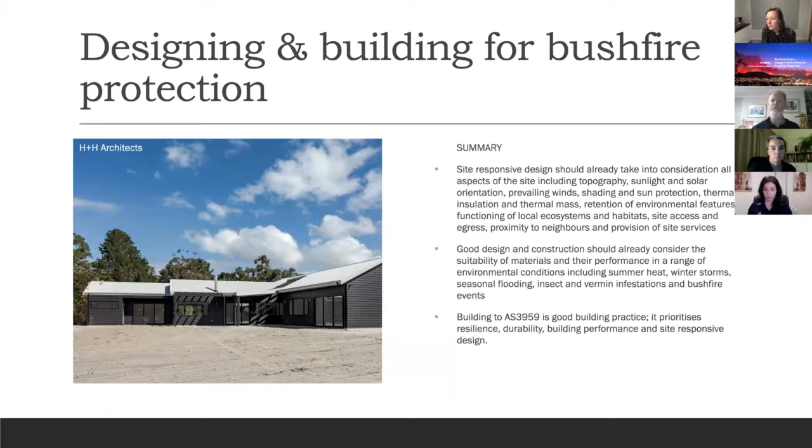I don't know if I've got time, maybe you could nod at me, Jacinta, to cover a quick case study people might find interesting about the retrofit of an existing single-storey beach shack. I think people are so interested in your presentation, so I think you should go ahead. I wouldn't want to stop you, so I might get some comments from the audience if I were to. But we're also mindful there are a lot of questions as well.

Great, no worries, there's only a couple of slides here. So I just wanted to include this one. This was a project that we worked on in our office. You can see from the photo here, this was the absolute classic Australian bush shack. It was made of recycled materials, timber framed with asbestos cladding, a dodgy old roof that had been sourced from sheds, an exposed subfloor, very steep site.

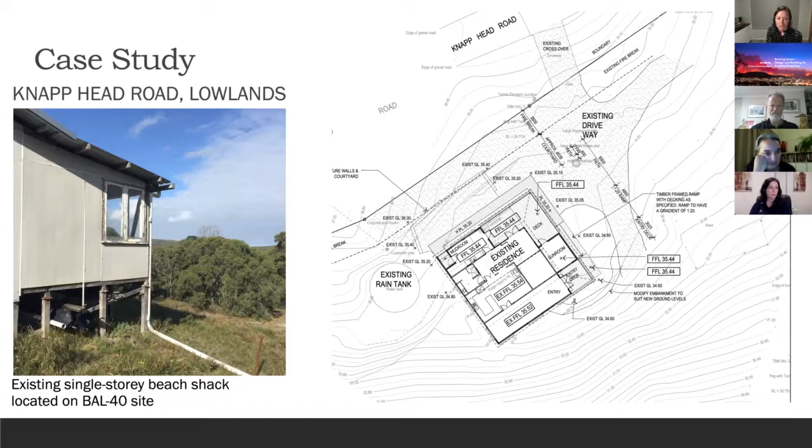When we first classified this site, it was actually FZ. The clients went back and did vegetation management to create a larger clearing around the site and a reduction in fuel loads, and we managed to get it down to BAL 40. We then ultimately did a retrofit to this building to try and bring it up to code.

So you can see an example, this is what it looked like when we started. So fairly low quality construction.

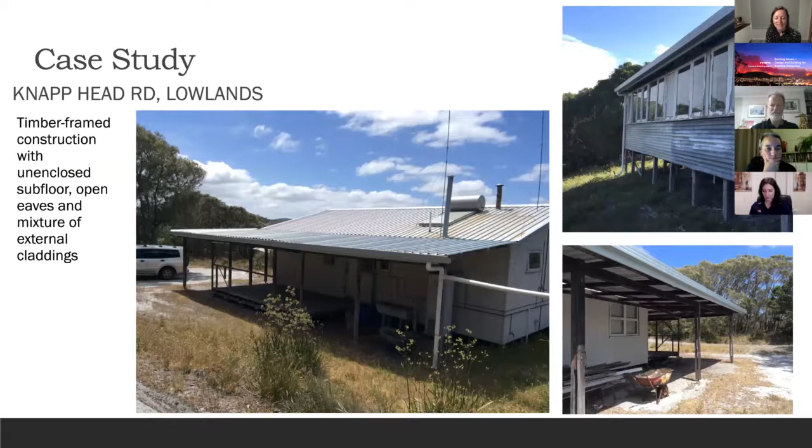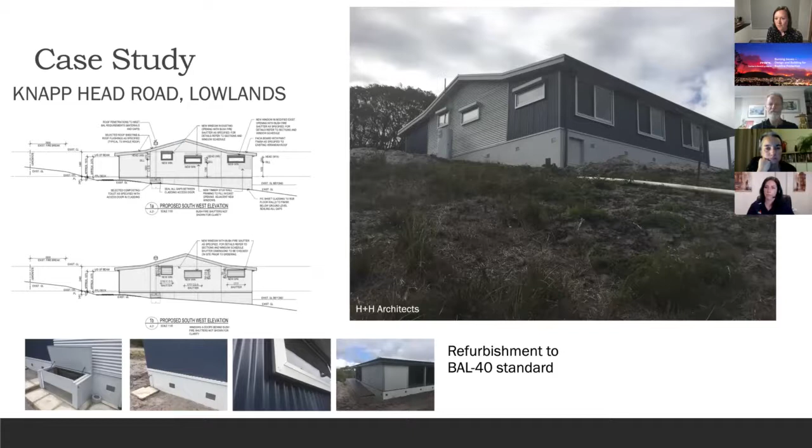There's some examples there. So this was the one that I showed previously that's got the bushfire shutters on the verandas. They really wanted to protect the whole building, so we could have put those bushfire shutters onto the windows, but they wanted them on the veranda, and it creates quite a nice space for them in their everyday activities of keeping the flies out when they're having a barbecue.

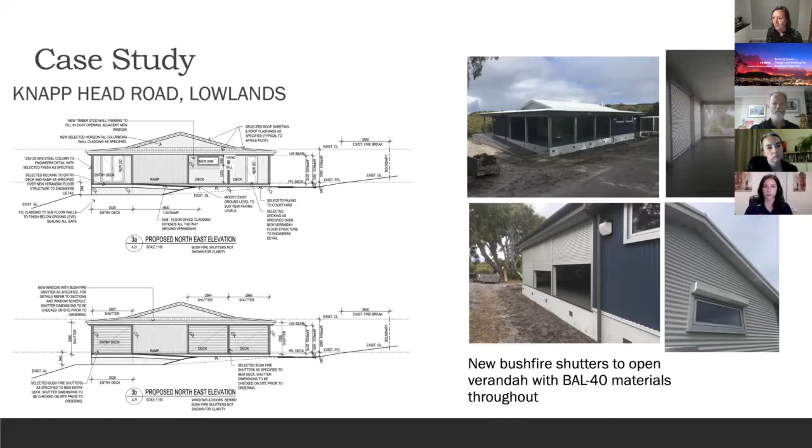So hopefully that gives you a good overview of sort of what you can do to an existing building, even when it looks like it's a lost cause, which was certainly our first advice on that one. And that's it. Questions?

Over to you, Peter, for the questions. Thanks, Jacinta.